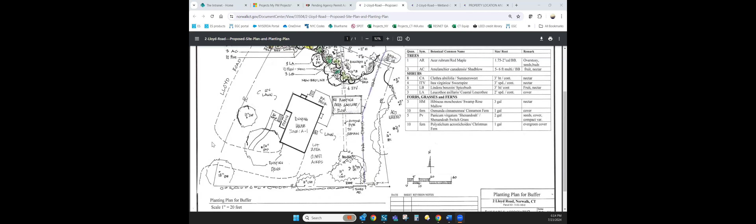And as we speak right now, even though we had rain the other day, I went and looked at that pipe early this morning, and that brook wasn't even flowing as of this morning. So it literally just flows after a rainstorm, and then it flows a little bit in the spring because it's more wet during the spring months with the higher groundwater table.

I'm planning on also speaking with the town engineer. We're setting up a meeting to talk about the connection, just so he's aware that there isn't an actual connection from pipe to pipe with the actual easements that are on the neighboring property. We just conveyed our water through this property and discharged it in a controlled manner. Basically the same way the brook did before.

It's just now, instead of heavy rainstorms washing sediment and doing scouring along this brook, now the water's flowing through the property, being conveyed in a controlled manner. So that's why I feel it's important to keep some type of structure here, conveying this water through the property. It only benefits the town, the neighbors. It really benefits everybody from a sedimentation deposit standpoint and an erosion control standpoint. If there's any questions or anything I missed, I'd be happy to answer them.

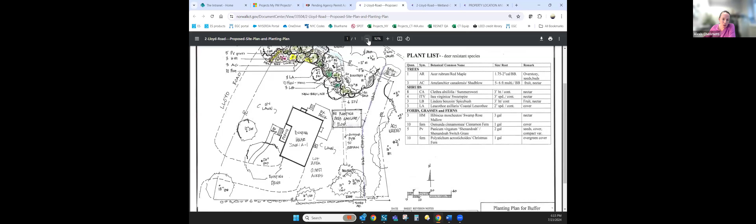Could you just go over again the connection? So what is the total length of pipe that was installed recently on the property, first of all? I don't have that number offhand, but I would say it's probably 80 feet, maybe. Maybe 70 or 80 feet. It's 100 feet on the survey? Yeah, that's what I measured. I measured 100 feet on the survey. Okay, so it's 100 feet of pipe now compared to the 15. Yes, 100 feet of pipe.

Okay. And can you explain again where the pipe ends and how it ends? So the way the pipe ends is it just ends just before the edge of the property, because there were a bunch of trees there with root balls growing into the edge of the bank that the owner didn't want to disturb. He wanted to leave all the trees because he wanted the screening. So he just stuck the pipe right at the edge of that area and backfilled over it so that he didn't disturb the roots of the trees. So the end of the pipe is actually open right after the edge of the property.

The reason why it's hard to see that visually is because at the edge of the property, if you're standing looking at the property from the road of Lloyd, the neighbor to the right has a little shed right on the property line with a deck that the pipe then leads underneath. So the neighbor's got a shed over this area; it's covered up. Okay, but is that open area on the subject property, or is it on the adjacent property? It's on the adjacent property. There might be a few inches on our property, but it would be minimal.

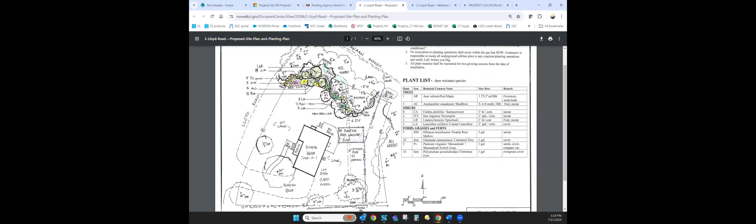So if you were taking a meandering brook and then you channelize it and increase the pitch of it, that doesn't affect the speed or volume across the site? No, we didn't increase the pitch. We maintained the overall slope of that intermittent water course. It's not a brook. It doesn't flow when it's not raining. Well, either way. We maintained the existing slope with the pipe. We basically used the bottom of that channel to sit the pipe in to maintain that slope. So there was no excavation to make it deeper or anything like that. We just sat the pipe into the channel. Right.

And Jay, I gotta ask, on this biological narrative and impact assessment report, and I may just be confused, but you've got here on page 4, the 2 Lloyd Road site contains no wetlands, but does contain a regulated inland water course. But didn't we just see on your other documentation that there definitely are delineated wetlands on the site? It's a complicated story. Well, here, I see the original owner's flags, and so I expect to see wetlands. Is that true or is that not?

This property originally belonged to Otto Theall, who was a wetland scientist. You're probably familiar with him. He lived here since like 2000. He just sold the property this year. And about 2000, he did a delineation for a deck he did on the property. And this is the wetland delineation that he performed and was submitted to the town at that time. And I had asked Alexis to search your files and get a copy of this for full disclosure.

I went out there this spring in order to look at the wetlands on the property, and obviously it's been altered, because the pipe was put in there. And I also had Jim McManus, who's another soil scientist, meet me at the property so we could get a consensus on what we saw there. We both felt that there was an intermittent water course on the property, but we both felt that the associated wetland soils weren't there, mostly because of the disturbance history of this property.

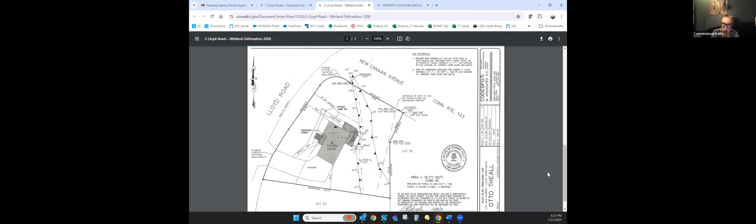And did you dig down to get to where you think maybe the original soils might have been before the pipe was installed? I didn't go that deep, for a variety of reasons. I just didn't go that deep, no. Okay, and then the second question is, in looking at the topography, there's a grade on it. So I understand the emphasis on the flow of the water course, but it seems that there's also a catchment function of this water course area.

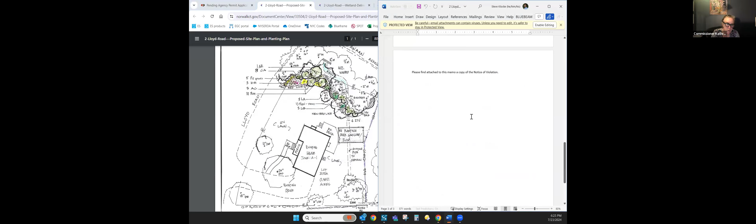In terms of detaining water? Yeah, in terms of just draining from the topography, because it goes down. It conveys, it's a straight shot. There's no detention function. It was designed to get the water through the property as quickly as possible. A narrow 1 or 2 foot, pretty much straight shot through the property. There was no vegetation associated with the water course. And there would be minimal storage, if any, because of the way it was designed to go straight through. There's no meanders or areas for the water to back up on the existing water course. Yeah, the grade just kind of flows down into that area where the pipe is on both sides.

But it was prone to flooding though, right? Wasn't that part of the reason why that was piped? Excuse me, Alex? But it was prone to flooding. Oh, definitely, it receives a great deal of water during storm events, and it surcharges. And that's what happened. The ditch would surcharge and would overflow and go into the house. So it does receive quite a bit of water, and if you look at the report, I did include a watershed map as a final exhibit.

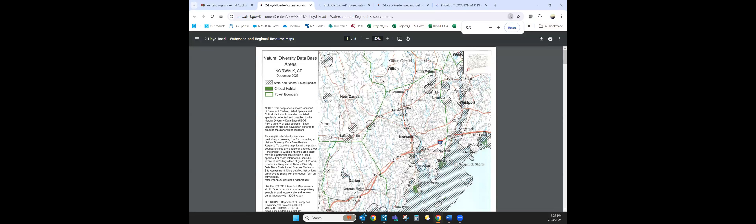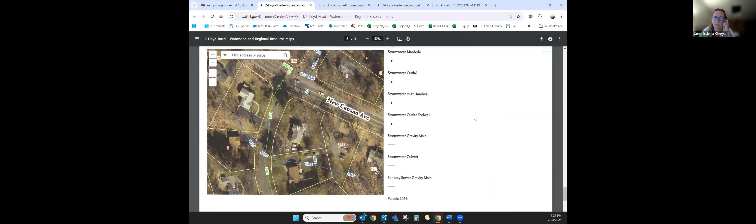Commissioner Brown? Yeah, I was wondering if they could go over the piping a little bit more. I'd like to understand the speed of the water, and I am still a little confused as to where it outlets. Brian, you want to take that one?

Yeah, it's an open outlet at the end, at the edge of the property. There's no connection to any pipe that was there. It flows open at the end. And that's the best scenario to make sure these pipes don't back up too. There's got to be access points. If there's some type of an agreement we can make with the neighbor, we could put some type of structure that's approved by the city engineer there to have some type of inspection area.

But it is just an open pipe at the end of the property. That's 100%. The velocity of the water traveling through the pipe, I mean, typically we don't go with velocity unless we're talking about scouring at the end of the pipe, which is a straight shot. I believe from the end of this pipe, there's a little opening between this and then where it starts to get piped again. And I haven't seen any erosion on the bottom side of the property. All the erosion's happened on the top.

Because you also have all the road water that just sheet flows off the road down into this property as well. But the flow of this pipe can handle like 35 CFS. The old pipe could only handle about 24 CFS, if I can remember correctly. I'm going off of memory here. But you're talking about the 15-foot small section of pipe. Yes. Yeah, so we increased the capacity of the intermittent water course through there.

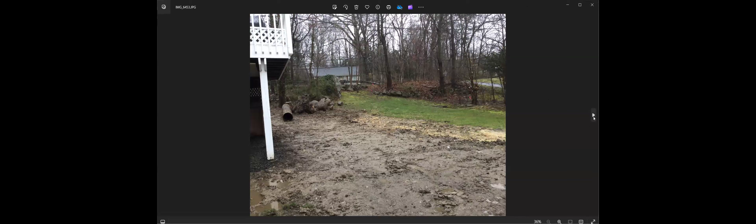It's not any more concentrated than it was before. I would disagree, but it's a channel. So it was like a U-shaped channel, right? That's a certain width versus the pipe that's circular. It's the same channelized flow. And if the town engineer wanted, we could get a letter from the neighbor that he wouldn't oppose this connection.

So this was the channel previously. And these are 1 foot contour lines. This was the 15-foot section of pipe. And then it looks like this is some sort of head wall, and then it begins a pipe again, which then continues, and it's piped, and then it's open on this property, and then it's piped all the way down to the Silvermine River. And so you're saying that the pipe ends at the property line and then is more or less directed into, I haven't been on the adjacent property, but whatever inlet structure there is here.

Yeah, and the problem with the inlet structure there is there's a deck on top of it that the neighbor has built on top of this head wall. Okay, so there's a structure. This is the little shed that was in my other photograph, and then it has a deck. Yep. Little deck there, yeah.

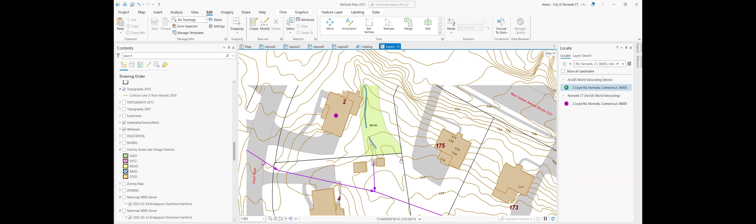I can't see everybody. Do any other commissioners have questions or comments? I don't think I was around when this was received. And I'll just say in the 25 minutes we've been talking about it, I don't like it any more than when I first saw it. Oh, Commissioner Knight, go for it. Maybe you can articulate something better than I can.

Yeah, it just makes me feel a little uncomfortable leaving it that the wetlands just disappeared. You know, that's not very helpful or doesn't leave us very comfortable in saying, okay, because once they disappear, they disappear. And it seems very suspicious that, you know, it seems like it was filled, the wetlands were filled.

The second question I have is just looking at the picture, is that bamboo on the property line? No, there's no bamboo on the property, unless it's on the other side, but I don't think there's bamboo out there. Jay, is there bamboo out there? Not that I'm aware of. It was just in the picture, the shed picture. Yep.

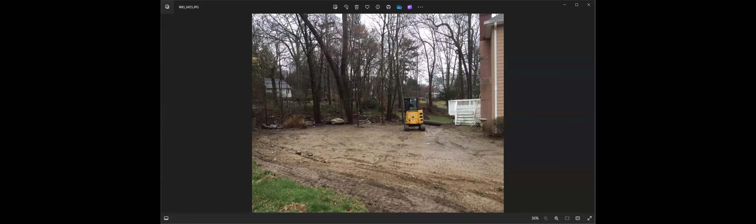You know, keep in mind, there was a gas main put through this property as well. So the soils are all disturbed, which is, in my opinion, why it's hard for a soil scientist to determine if there's wetlands there or not. Well, all you gotta do is look at the topo plan. If you can go back to that, Alexis, I'm sorry. There, right in front. That's where it looks like the bamboo is.

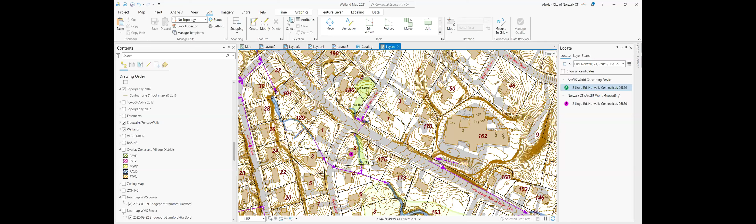It's pretty stinking obvious what the watershed looked like before people started building houses in the neighborhood. And this seems to be the one property in this flow that wasn't filled in. I mean, just look, it's pretty obvious, I think, where the water was going. Now, this is before- GIS topo? Yep. Yeah, so this isn't T2 certified, right? So the accuracy of this is, you know, again, fairly accurate.

Commissioner Brown, go ahead. I'm just wondering if this is a situation where we need a third party to look at this, an outside party. Absolutely. Commissioner Knight. I agree. Yeah, I think that's just plain as day, guys.

Sorry. I had lunch, I'm not in a bad mood, I promise. But it just doesn't smell right.

I think that's fine. Okay, good. I don't have any problem with that whatsoever. We're not trying to hide anything. We're just giving you our professional opinions. And you know, the commission is certainly entitled to get a third opinion. That's great. Okay, Alexis, then you're gonna explain that to us. Yeah, so just third party, just wetland delineation or wetland delineation and wetland kind of assessment and impact. Both, I say.

Can I ask a silly question, perhaps? Ask away. Hearing no objection to that. As far as any of the activities that would take place to restore what has been, what difference would the delineation between the wetland and the watercourse in this case make? What do you mean? In other words, let me think of how to phrase this. Right now, if there's a watercourse on the property, there's action that needs to be taken regardless. There was a watercourse on the site and now there's a pipe. Correct, but that still counts. Right. And that's why they're before you getting an after-the-fact permit. Correct.

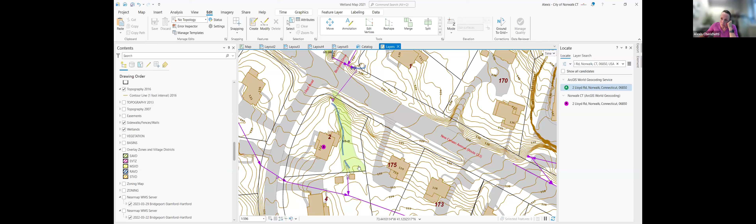Right, noted. Commissioner Brown? I'm just wondering, in the number of years that I've been on the commission, I don't remember ever having an application come before us that asked to pipe an entire watercourse through a property that we approved. I don't know if that is correct or not, but that's what I'm remembering. Alexis? Not that I can, let me think. And I guess my point is, if they had come to us to ask, I don't think this is something we would have approved necessarily, unless they had a lot of information, and now this information seems to be buried.

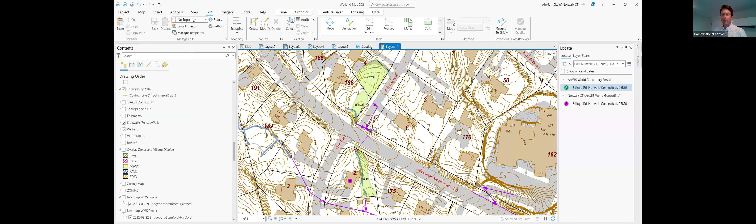Can I throw something else out? The alternate approach, number 2 in the July 15th document, biological narrative and impact assessment. Basically, alternative 2 is to put it back as it was. So if the owner was more interested in doing that and doing it in a way that you anticipate will satisfy the agency, you can save yourself the cost of that third party person. That's my personal opinion. I'm not speaking for everybody else, but I'd be happy with that approach.

Yeah, the issue with that is it doesn't address the property damage that is currently occurring because of the flooding situation. And again, we're very sympathetic and we want to work with the agency, but there is a health and safety concern here that we need to address, and I think it's a legitimate concern. Yeah, I would agree with you on that. Maybe there's an approach that can satisfy everybody. Yeah. We're all for trying to work together to come up with a good solution.

You know, the owner apologized for doing the work without the permit. He shouldn't have done that, and it's always easier to do it the right way than to come back and backpedal. And again, I apologize for that, for putting you in that situation. Oh, don't apologize to us. It's the way it goes. But yeah, I think everybody's on the same page now. Yeah, I just always wanted to make, you know, we have nothing to hide here. I'm trying to be full disclosure.

So getting a third party, if we get a reasonable and intelligent person, I think it's a great idea, and also consider, you know, alternative 2 plus. Yeah, but I think that would be much more discussion, because we probably would have to move the pipe or lengthen the pipe or do something that would not be the status quo in order to address the damage that's occurring. And so I think we need agency input with that.

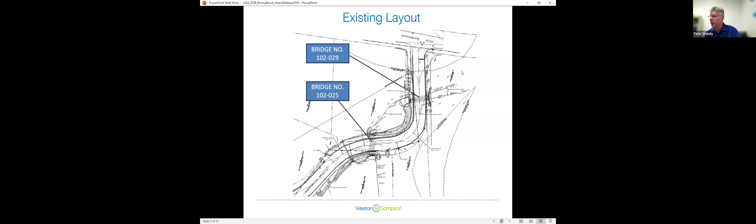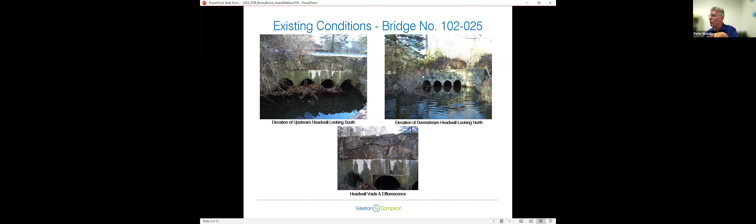A couple of things that we just want to note: this debris will be removed when we're doing the work. It's part of the work that the contractor will be doing. The other thing is they will probably be trimming. They're not removing shrubbery, trees, or anything like that, but they may have to do some trimming just so they can get into the head walls to do the work.

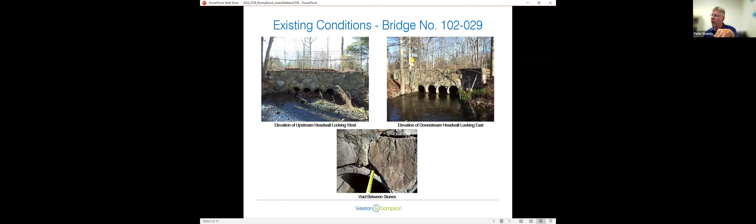This is Bridge 029, same addition. We will be removing some of this debris, a lot less debris at this one. And again, we may have to do a little bit of trimming, but there really wasn't a lot of shrubbery or trees in the way of either one of these structures that we should have to remove.

We show that there's a cofferdam, and we're going to be doing this in segments. We have a cofferdam that will be placed at 2 different times. At one time, at least 2 of the pipes will be cordoned off, so 2 of them will allow flow through them.

The purpose of that is the contractor's responsibility. If the flows are going to be very high, he would have to pull his stuff out, anything blocking the culverts themselves. But as long as you're around the 2-year storm event, which is what we looked at, the culverts can definitely handle that with 2 of them with no issues, and we can cofferdam the other side.

We are putting in some riprap and protection around the existing structure, and we're also going to be doing repairs at the head walls themselves. Additionally, we're going to put some guardrail along the structures to protect traffic from going off the roadway.

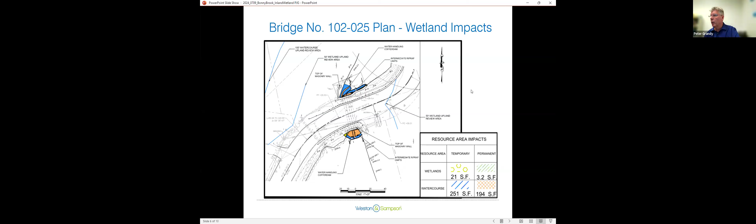And again, we're not removing any trees or shrubs. And we are asking, if they are to be removed, they have to get the town's approval before they do any removal. But the shrubs may be trimmed back at the bridge structures just so they can get in and do their work. It's not anticipated that would be a lot of trimming.

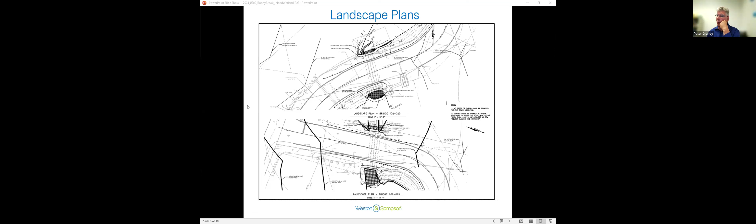Do we have pictures, or some sort of images of what is currently there? Sure. I think I had that originally, hang on a second. Sorry, I'm a visual person. This is that old 25.

It's just a little bit of these bushes to pull out, and then this is at the upstream head wall, where we would clean this out. This would have to be cleaned out, and there is riprap going in here because we do have a little bit of scour going on at both the inlet and the outlet, which is not unusual for these types of structures.

And the purpose of the riprap, because it's a heavy rock, is that it will not scour. It will protect that waterway, so you don't have this little drop-in area in front of the structure because of the turbulence. This is because of the turbulence and a little bit of the soil material underneath it, but it's basically the turbulence caused in heavy storms. The water gets moving quite quickly and becomes very turbulent when it's trying to enter into the pipe, and that also removes the stream bed material at the bottom.

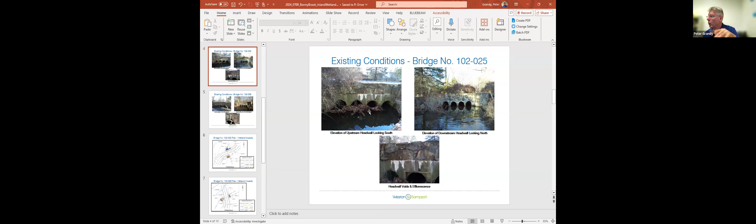When we put this riprap in, we are also putting stream bed on top of it, because fisheries and that group don't like the rough rock being in contact possibly with fish traveling through. So we will put a stream bed on top of it. So that's the first one.

And then this is 29. Again, as you can see, this one has a lot less. So I don't think we actually have anything that we're going to end up removing on this one. But we are going to do some clearing in this one area in front of the structures or the pipes themselves to allow better water flow, so you won't have this stuff interrupting that water flow.

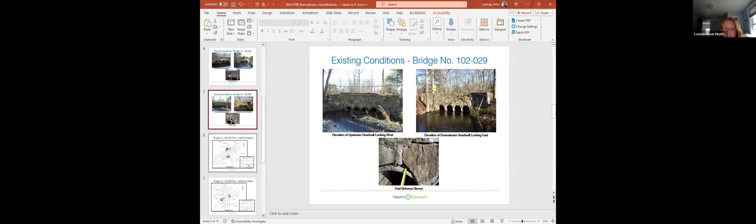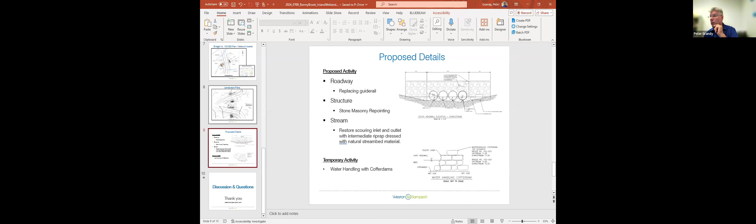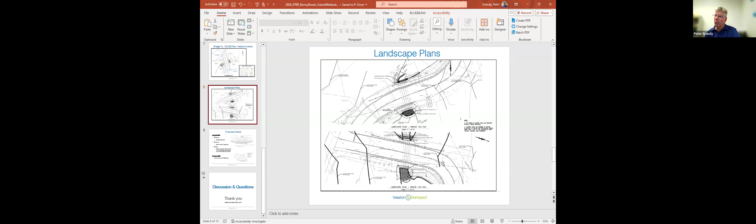And like I said, we're replacing the guardrail as we showed in the original plans, because there's 3 cable guardrail there. The one we're putting back in will be a timber guardrail with a steel post. It will keep traffic from moving off the roadway and should deflect it back into the roadway if somebody hits it. We propose using the Merritt Parkway guide rail to try and match the aesthetics of the neighborhood. So it's not going to be a metal beam rail. It'll be a Merritt Parkway timber guide rail, as Peter mentioned.

Yeah. From the standpoint of the DOT, we cannot call it the Merritt Parkway guardrail, even though it's the exact same system. The Merritt Parkway guardrail is only supposed to be used on the Merritt Parkway. That's why we end up calling it a timber guardrail. I hate to say it, but I'm letting you know. No, that's exactly why I wanted to give people an idea of what it would look like. Yep. But Peter's correct. We're not supposed to say that, even though it's the exact same thing. Yes.

Okay, thank you for that. Hopefully they will listen to this recording. I'm just kidding. Well, even if they are, that's okay. They know it's true. I think it'll be all right. We're using it as an example in a positive way. Yes.

Okay. Commissioners, any questions? I don't see any hands raised. So I guess we will look forward to seeing a draft resolution from Alexis or Amelia next meeting. Yes. Thank you. Thank you very much, and thank you for having us. We appreciate it. Good night. Take care.